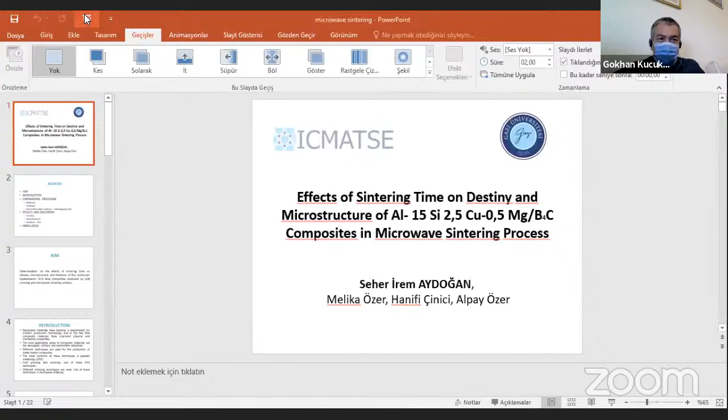Hello, it's Seher İrem Aydoğan, and this is the presentation of the study named Effects of Sintering Time on Density and Microstructure of Boron Carbide Particle Reinforced Aluminum, which contains 15% by weight silicon, 2.5% by weight copper, and 0.5% by weight magnesium composites in microwave sintering process.

The topics mentioned in the presentation are the aim of this research work, experimental methods followed, results and discussions, and conclusion of the research work.

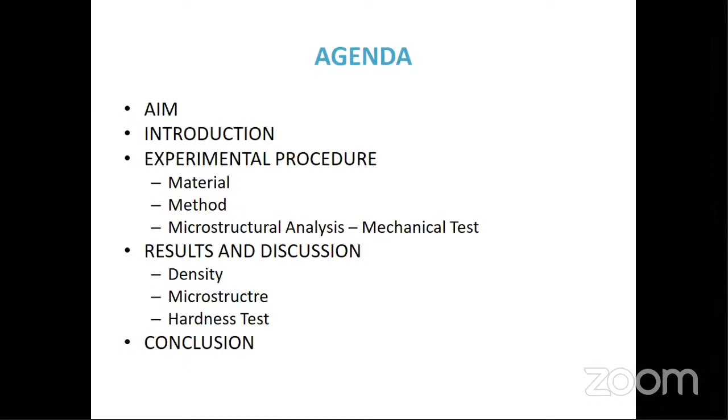This study aims to determine the effects of sintering time on density, microstructure, and hardness of boron carbide reinforced hypereutectic aluminum silicon alloy composites produced by cold pressing and microwave sintering process.

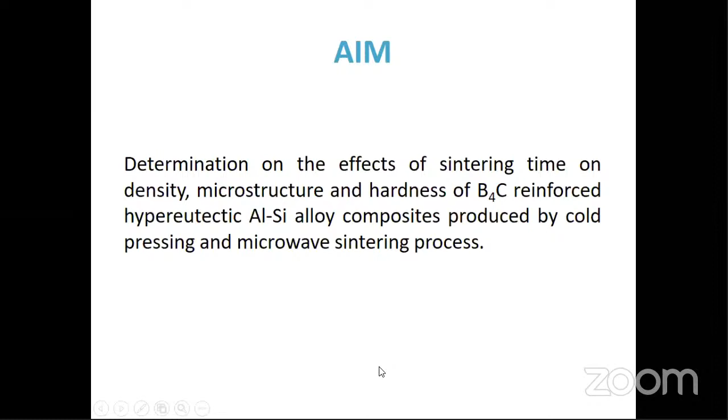Composite materials have become a requirement for modern production technology due to the fact that composite materials have improved physical and mechanical properties. The main application areas of composite materials are the aerospace, military, and automobile industries.

Different techniques are used for the production of metal matrix composites. The most common of these techniques is powder metallurgy. Cold pressing and sintering is one of the PM techniques. Different sintering techniques are used, and one of these techniques is microwave sintering.

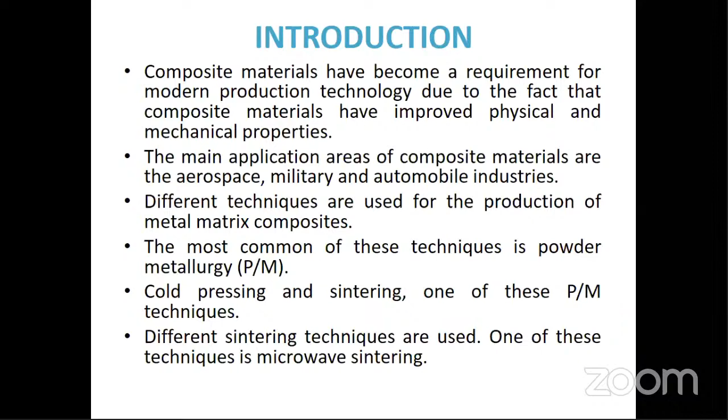Microwave heating is due to the material's ability to absorb high-frequency electromagnetic energy and convert it into heat. The microwave heating occurs from the core and generates heat inside the sample. The use of microwave energy for sintering materials has advantages in reduced processing times and energy saving.

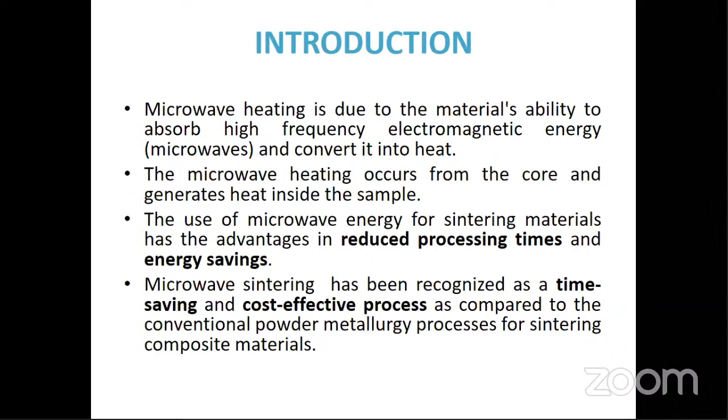Microwave sintering has been recognized as a time-saving and cost-effective process compared to the conventional powder metallurgy processes for sintering composite materials. In this study, hypereutectic aluminum silicon alloy has been chosen as the matrix material. Boron carbide was used as the reinforcement.

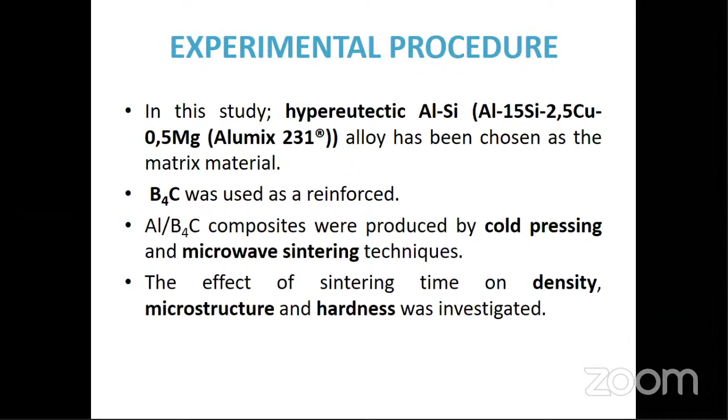Aluminum boron carbide composites were produced by cold pressing and microwave sintering techniques. The effects of sintering time on density, microstructure, and hardness were investigated.

Table 1 represents the nominal chemical composition of the matrix material. The Alumix 231 powders with an average size of about 75 micrometers were produced by inert gas atomization. The reinforcement particle boron carbide has a density of 2.52 grams per centimeter cubed and average powder particle size of 10 micrometers.

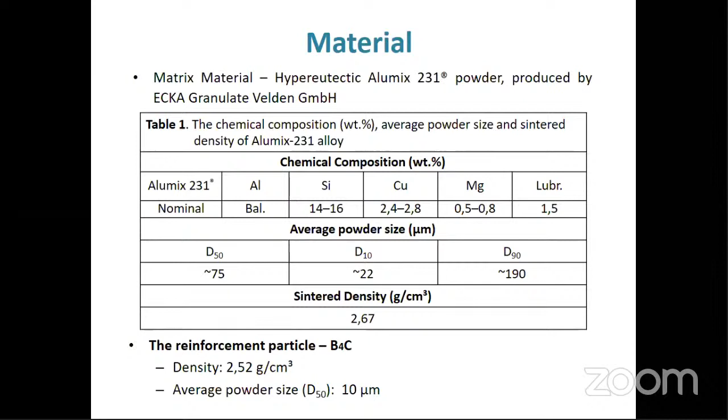The samples were subjected to elimination of the lubricant at 400 degrees for 20 minutes. Sintering was carried out at 555 degrees for 15, 30, 45, 60 minutes and without holding time. Heating rate to lubricant elimination temperature was set at 5 degrees per minute and sintering temperature heating rate was set at 10 degrees per minute.

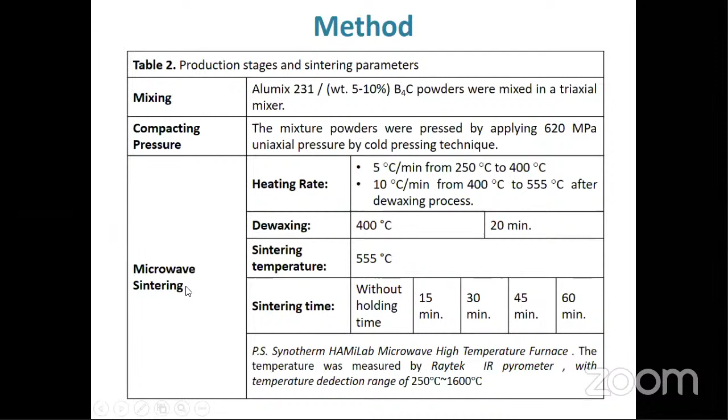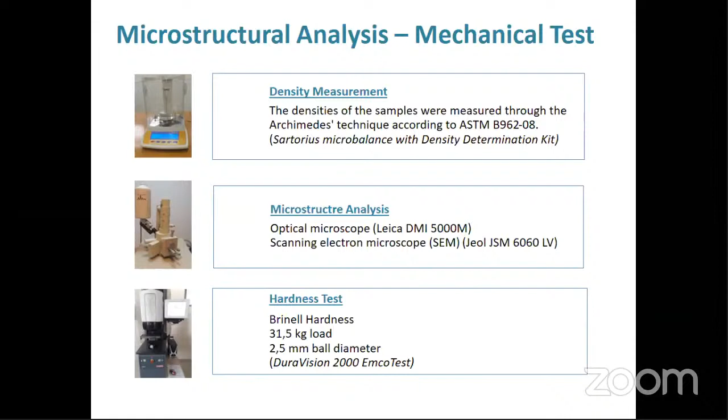The experimental results were discussed in this section. The MW sample code shown in table 3 represents microwave sintering. The numbers 0, 5, 10 next to the MW code indicate the percentage by weight boron carbide particle ratio.

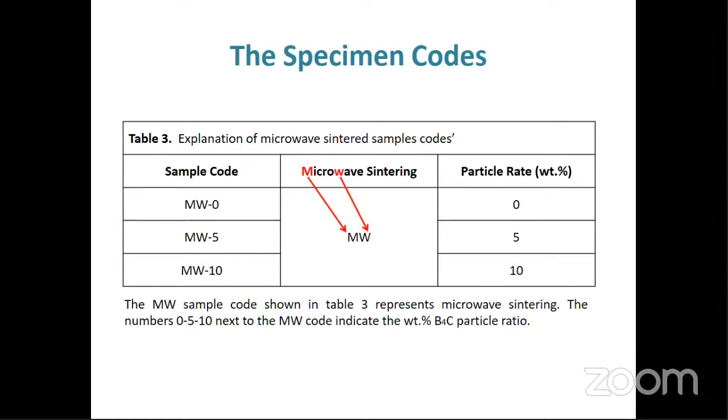Figure 1 represents the SEM micrograph of the sample MW0 sintered at 555 degrees without holding time, and the EDS results shown in table 5 were marked in the figure as points 1 to 4.

Point 1, light gray particles, contains 94% by weight silicon in EDS results. These are primary silicon particles.

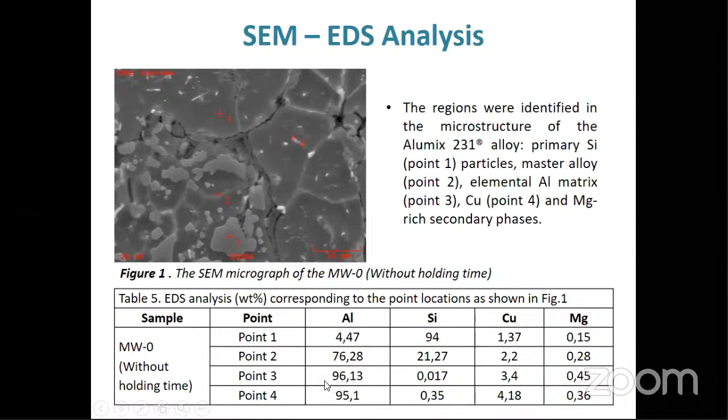Figure 2 represents the microstructure map of the MW0 sample sintered at 555 degrees without holding time.

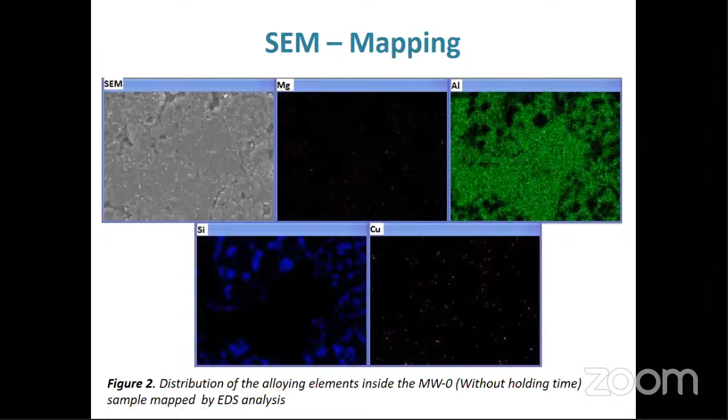The map shows that the primary silicon particles, the blue ones, emerge in the original master alloy grains. Copper and magnesium-rich second phases had a homogeneous distribution in the master alloy and elemental aluminum regions.

The SEM micrograph of the MW5 without holding time sample is shown in Figure 3. The master alloy, pure aluminum region, and boron carbide particles are summarized in the micrographs.

The primary silicon particles have grown from the master alloy powder.

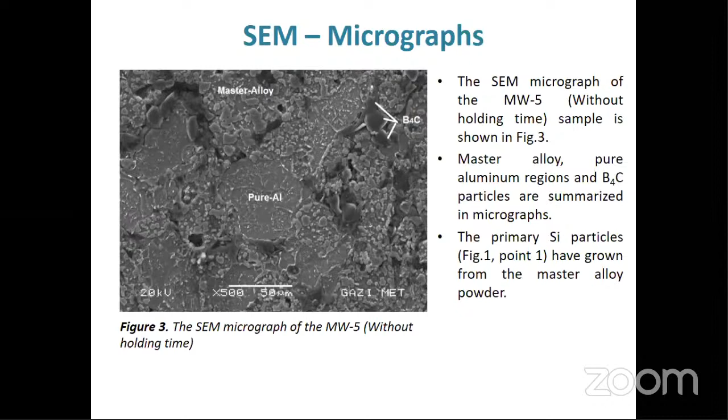Optical micrograph of Alumix 231 samples sintered at 555 degrees are given in Figure 4.

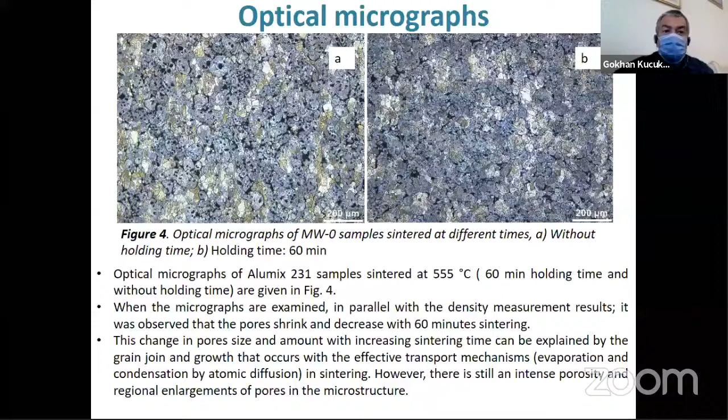When the micrographs are examined in parallel with the density measurement results, it was observed that the pores shrink and decrease with 60 minutes sintering. This change in pore size and amount with increasing sintering time can be explained by the grain join and growth that occurs with the effective transport mechanism in sintering.

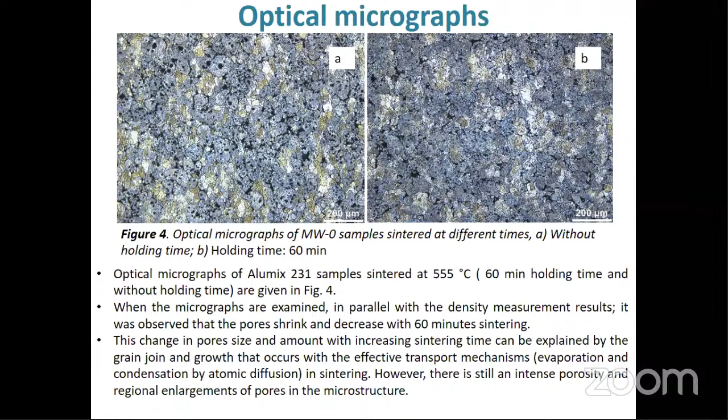However, there is still intense porosity and regional enlargement of pores in the microstructure.

In addition, the bonding problems between the grains are seen in Figure 5.

There wasn't a good diffusion event, and sufficient cohesion between the grains couldn't be achieved. Therefore, a long sintering time of 60 minutes didn't show the expected improvements in microstructure and density compared to the sample without holding time.

Wettability of boron carbide particles and its bonding ability with the matrix material are difficult. So, with the effect of the sintering process, the boron carbide particles...

push towards the grain boundary. Hello. Hello.

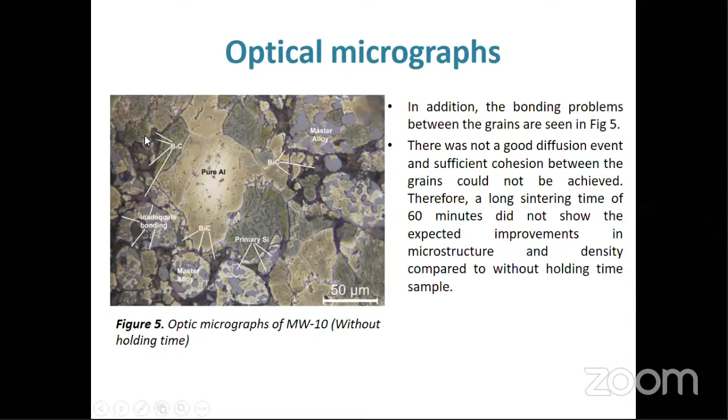The highest hardness value was determined in the sample coded MW0, which was without holding time.

There was no significant increase in hardness in the sample MW0 and MW10 at 60 minutes sintering time. Although there is no significant change in density, the decrease in hardness caused by increasing boron carbide addition can be explained by the pushing of boron carbide particles into the pores and the grain coarsening during sintering. The decrease in hardness was observed with increasing sintering time in samples, due to grain coarsening with increasing sintering.

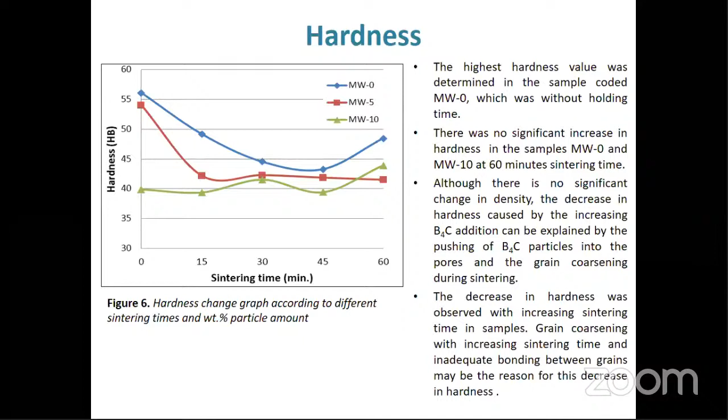Can I continue? Please go on. Thanks. The decrease in hardness was observed with increasing sintering time in samples.

Grain coarsening with increasing sintering time and inadequate bonding between grains may be the reason for this decrease in hardness.

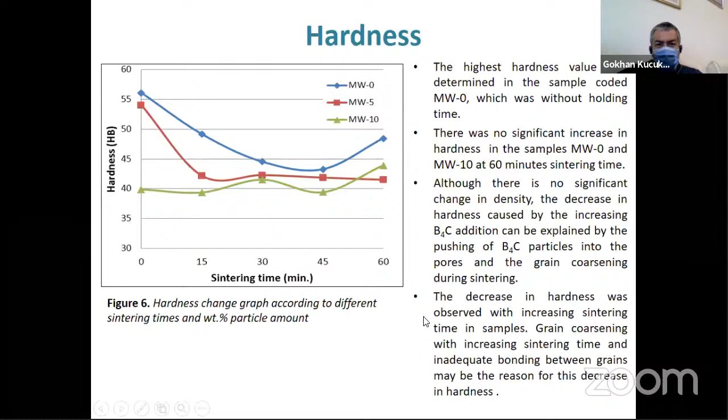Conclusions were achieved in this study. Boron carbide particle reinforced Ecka Alumix 231 aluminum composites were produced through the cold press microwave sintering technique. The sintering process was carried out without holding time and at 4 different times.

The green density of the samples decreased with increasing percentage by weight of boron carbide. Compared to the green density values, all samples had decreasing density with the sintering process. The highest density values in sintered samples were obtained at 60 minutes sintering time. However, these changes observed in sample densities were limited to small values.

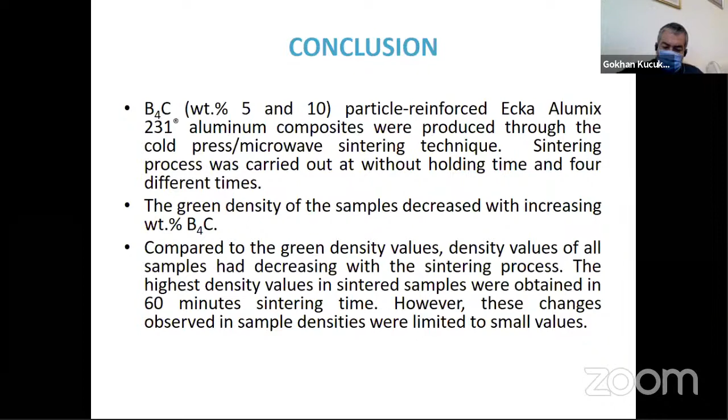Different regions were identified in the microstructure of the Alumix 231 alloy: elemental aluminum matrix, master alloy, primary silicon particles, and copper and magnesium-rich secondary phases. The primary silicon particles emerged in the original master alloy grains. The copper and magnesium-rich second phases had a homogeneous distribution in the master alloy and elemental aluminum regions.

The highest hardness value was determined on the sample that didn't contain boron carbide and was without holding time at the sintering temperature. Sample hardness was observed to decrease with increasing boron carbide particle ratio. It was determined that boron carbide particles clustered in the pores. The samples produced without holding time at 555 degrees gave optimum values in terms of density and hardness.

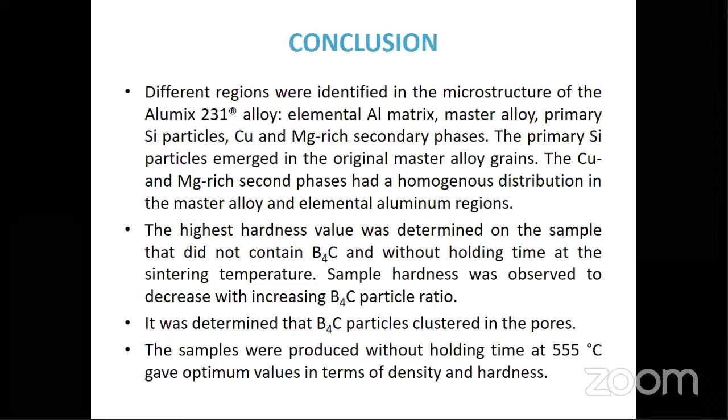Thank you so much, dear Seher İrem. Is there any question to ask to Seher? Dear audience, do you have a question for these presentations? Okay. Thank you so much. Very, very fruitful presentation. You're welcome. Thank you. Okay. See you there. Okay. Then shall we start the next presentations?

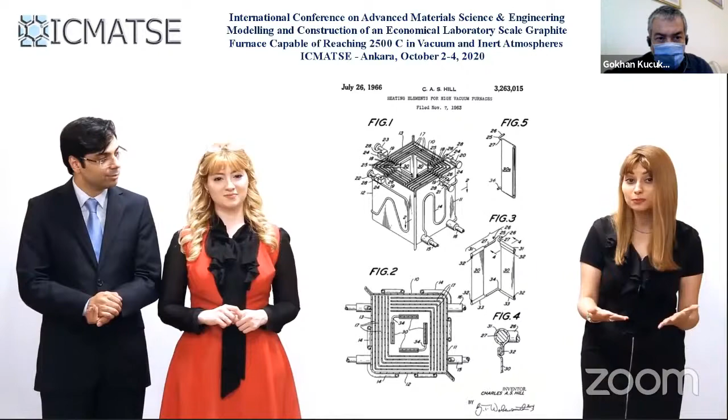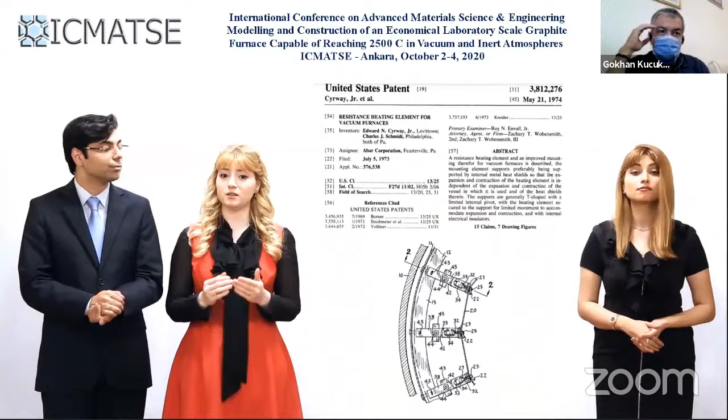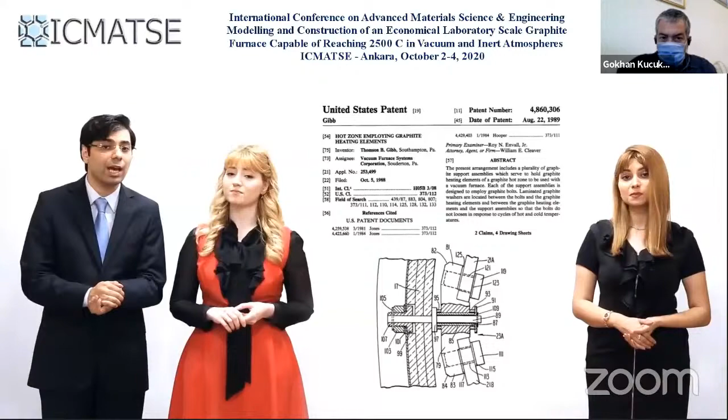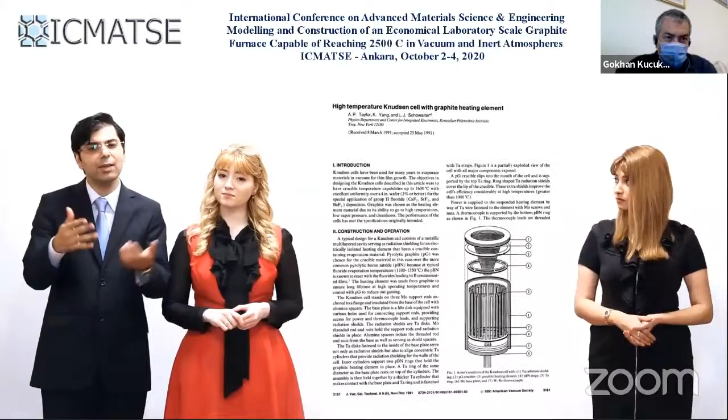There are very interesting graphite hot zone designs either published in academic literature or patented, some of which are widely used industrially. However, upon reviewing them in detail, we found that there are only a limited number of hot zone designs available that meet the requirements of a compact lab-scale graphite furnace for research and development purposes. It is noteworthy that the majority of available designs require utilization of step-down transformers with ampere ratings of over 1,000 amps, thus increasing the primary cost of the furnace as well as the cost associated with replacing and repairing the hot zone due to the geometrical setup of the graphite heating elements used in the available designs.

An additional problem with graphite furnaces is the difficulty in quenching operations, which tends to be solved through rather operationally inconvenient procedures, such as high inert gas purging as in the case of silica fiber drawing furnaces, making it rather challenging to quench a sample in vacuum.

So with these points in mind, we proceeded with the following design criteria for the furnace: the ability to reach 2,500 degrees Celsius in just minutes, capacity to sustain the mentioned temperature for several hundred hours if necessary, the ability to cool down the furnace at very high rates without using any fluid for quenching purposes, and most importantly, maintaining the cost of the main hot zone as low as possible.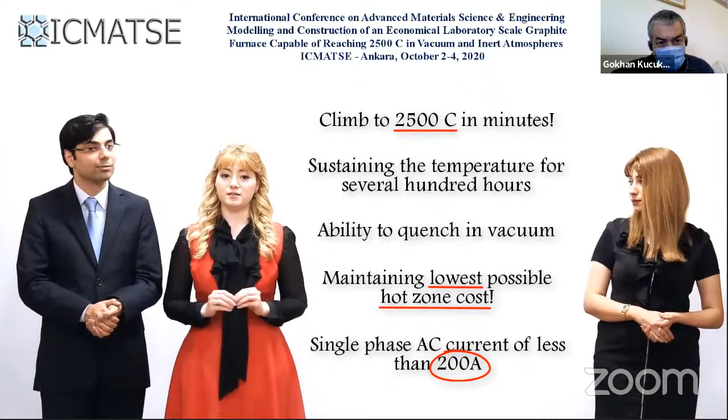We decided that the total current utilized should be less than 200 amperes, and it must be operational on single-phase alternating current, with the intention of minimizing the cost of the step-down transformer and other electrical components necessary for the system. So we tried a series of different designs which were simulated by finite element analysis.

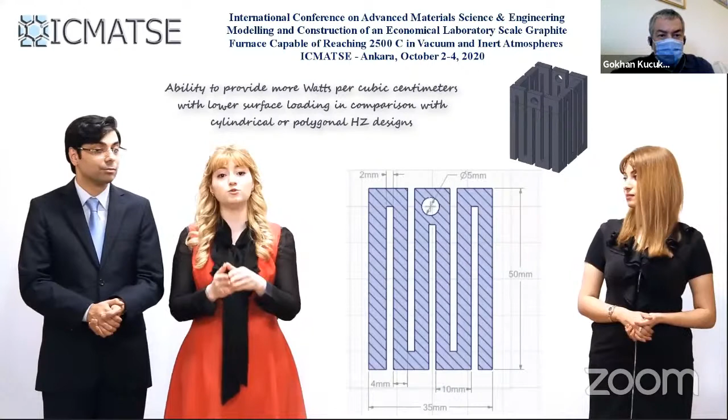It was concluded that the optimized geometrical design shown here is particularly interesting for a number of reasons, such as the ability to provide a higher total power dissipation by the heating element in comparison to a cylindrical or polygonal hot zone of the same volume, considering a constant surface loading value on both cases, which facilitates approaching higher temperatures and also extending the longevity of the heating element.

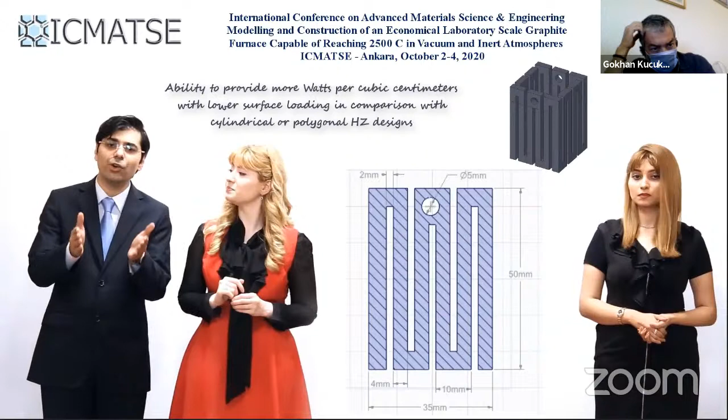Moreover, every cubic centimeter of high-purity graphite which has been sintered at elevated temperatures using hot isostatic press technology is very precious. So it is only logical to minimize the consumed graphite during machining of the geometry required. Therefore, in the proposed design, it is possible to simply machine slabs of graphite and to connect them using nuts and bolts made from the same grade of graphite, minimizing the wastage during the manufacturing process. It is also noteworthy that a similar volume of hot zone constructed in the conventional cylindrical or polygonal design consumes a significantly greater amount of raw material.

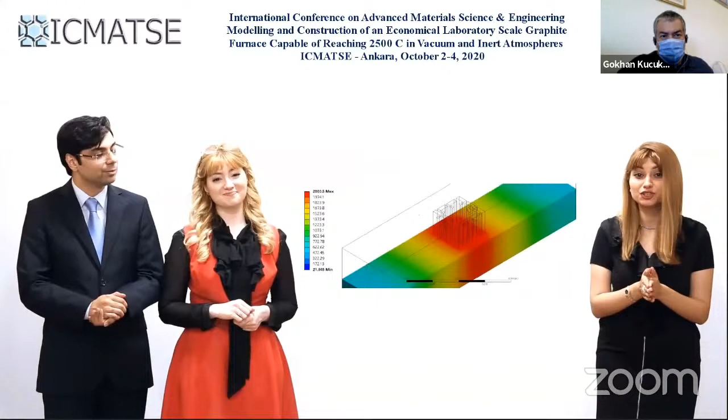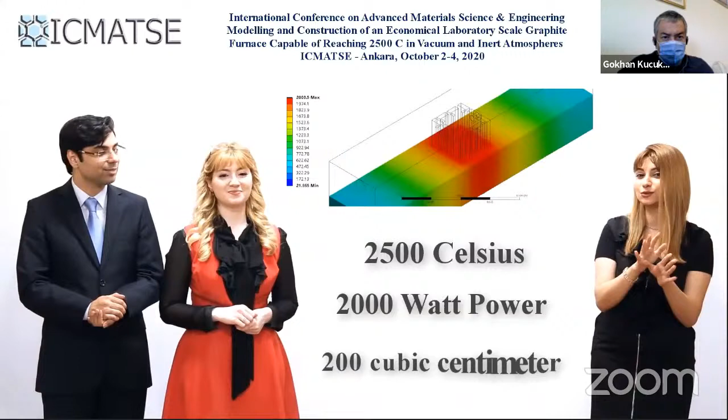Our thermoelectrical simulations on various graphite grades have shown that it is possible to achieve a temperature of 2,500 degrees Celsius with an approximate power of just 2,000 watts for a usable hot zone volume of approximately 200 cubic centimeters. Furthermore, the temperature variations within the central 60 cubic centimeters of the hot zone does not exceed 0.5% of the maximum furnace temperature. The mentioned values have been repeatedly confirmed experimentally.

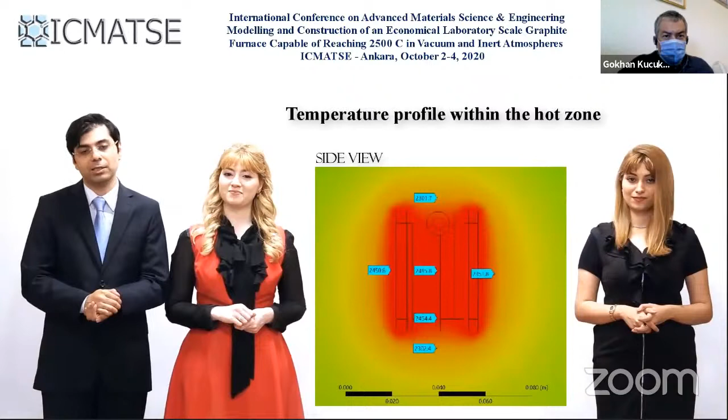The entire system works on single-phase alternating current, with the hot zone placed inside an ordinary vacuum chamber with two water-cooled electrical feed-throughs connected to a stainless steel chamber. And the entire system is practically consuming a power equivalent to 3 toasters.

Another beauty of this design is that due to its size, the water cooling system has the capacity to cool it down very effectively if the power is disconnected. We have seen an average cooling rate of approximately 300 Celsius per minute, from 2,500 to 1,000 Celsius.

On a different note, one should consider the thermodynamics of a system in which any sintering or heat treatment is to be conducted. It must be very clearly analyzed prior to any experimental work, as the furnace design in itself can have significant impact on the chemical equilibria which emerges, and also possesses the capacity to alter the phase equilibrium in solid state.

Therefore, we have done thermochemical simulations of the natural equilibrium of gases in the furnace, in absence of any forced gas flow, because even under such conditions, the thermochemical equilibrium as a result of the Boudouard reaction can quickly become dominant in a graphite furnace, either in vacuum or inert atmospheres. The molar fraction of gases which emerge under 1 atmosphere total pressure are shown here.

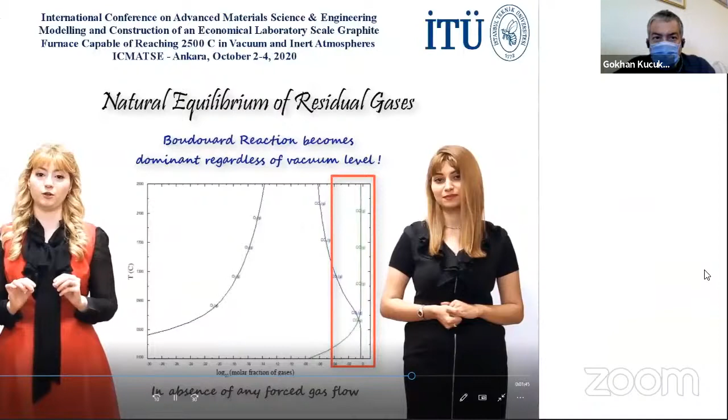It should also be noted that carbon monoxide's partial pressure cannot be ignored, regardless of the process in question. It should also be considered that the equilibrium partial pressure of oxygen in such a system is pressure dependent.

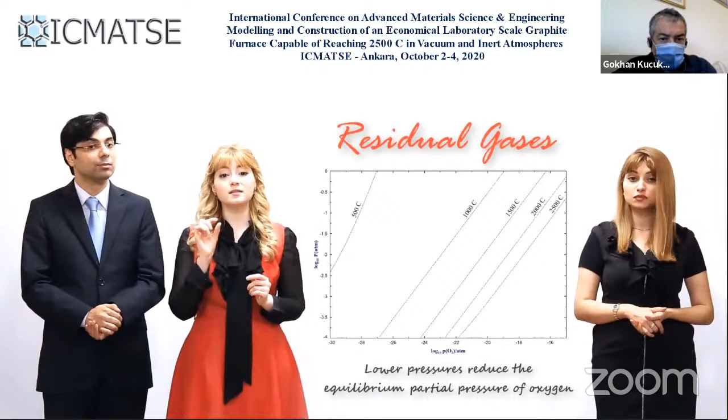Therefore, the choice of vacuum level or positive atmosphere's total pressure should be taken into account prior to experimentation with such a system. Special attention should be given to furnace atmospheres as a result of residual gases during a sintering or heat treatment operation.